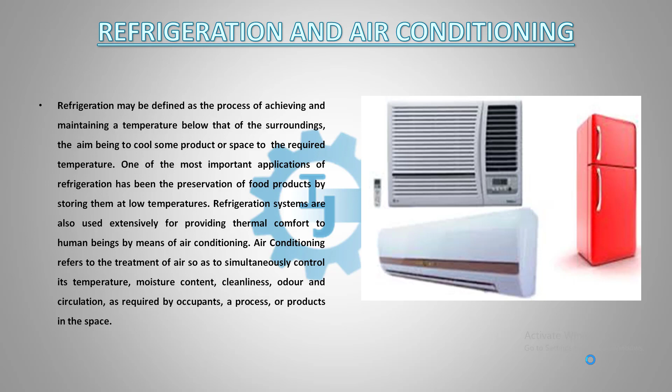Next we have to know what is the difference between refrigeration and air conditioning. In case of air conditioning, it is the process of removing heat and moisture from the interior of an occupied space to improve the comfort of occupants. And what is refrigeration? In case of refrigeration, it is a process of removing heat from a low temperature reservoir and transferring it to a high temperature reservoir.

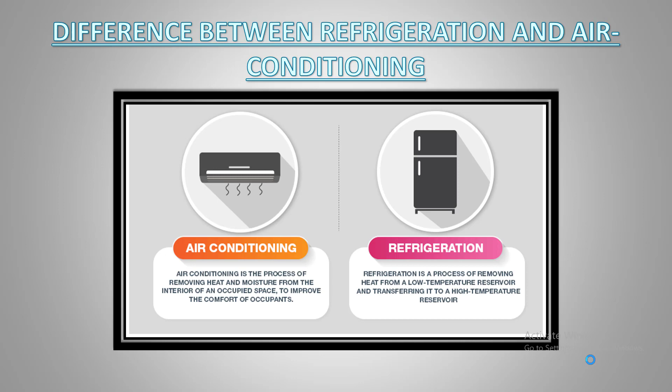The refrigeration system maintains the temperature around -20 degrees Celsius to 4 degrees Celsius, while air conditioning maintains a temperature range from 16 degrees Celsius to 27 degrees Celsius. Refrigeration cools down a small volume of space, while air conditioning cools a large volume of space. Refrigeration only lowers the temperature, but air conditioning maintains the environment, humidity, etc. So here we have understood the differences between air conditioning and refrigeration.

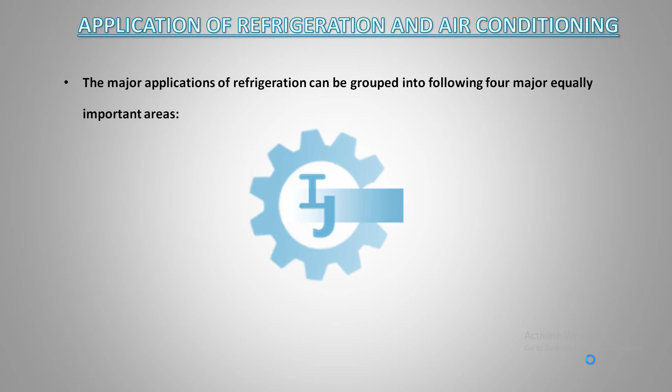Next we have to know the application of refrigeration and air conditioning. The major applications of refrigeration can be grouped into four major, equally important areas. One is food processing, preservation and distribution - we know in the food processing industry we store fruit, vegetable, fish, meat, dairy products, butter, milk, curd, etc.

We can use refrigeration in chemical and process industries, like separation of gases, condensation of gases, dehumidification of air, solidification of solute, etc. We can use refrigeration in special applications like cold treatment of metal, medical applications, ice skating rinks, and in construction, for manufacturing of ice.

And the next case is for comfort air conditioning we use the refrigeration system. Now we have to know what are the applications of air conditioning systems. The applications of air conditioning systems are industrial air conditioning and comfort air conditioning.

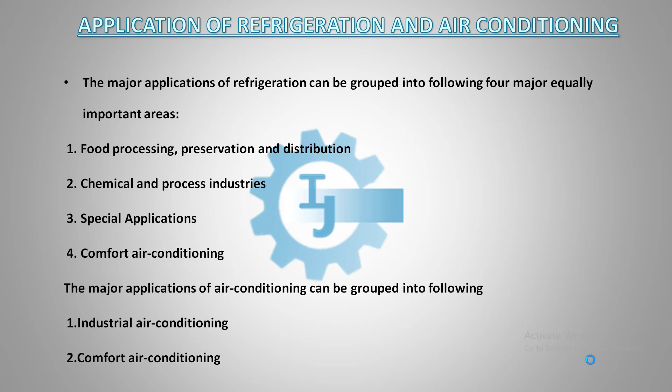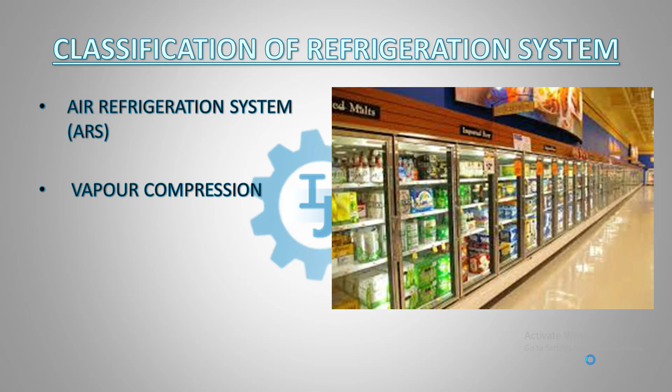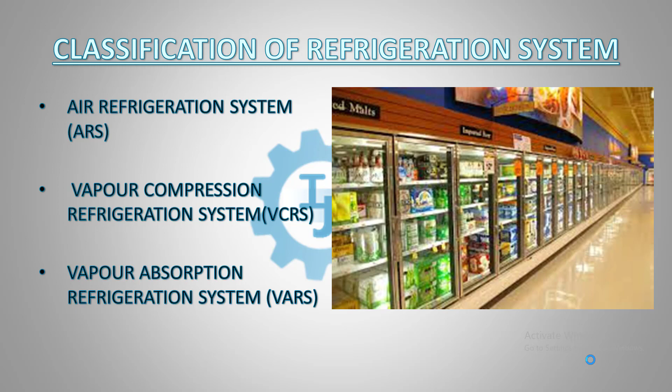Now we have to know the classification of refrigeration system. The classification of refrigeration system is: air refrigeration system, vapor compression refrigeration system, and vapor absorption refrigeration system. We have to study in detail these various types of refrigeration systems, their working principle, and their applications. Now, what are the classifications of air conditioning system?

According to the purpose, we can classify the air conditioning system into two categories: one is comfort air conditioning, another is industrial air conditioning.

What is industrial air conditioning? It creates, controls and maintains an environment inside the conditioned space that best suits the needs of the industry. In case of comfort air conditioning, it's aimed at giving maximum human comfort to the occupants or users of the conditioned space.

According to the season of year, we can classify the air conditioning system into winter air conditioning, summer air conditioning, and year-round air conditioning. We use winter air conditioning in winter season, summer air conditioning in summer season, and year-round air conditioning as an all-weather air conditioning system.

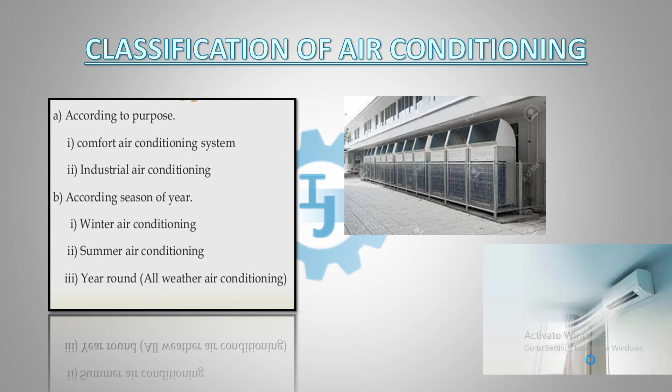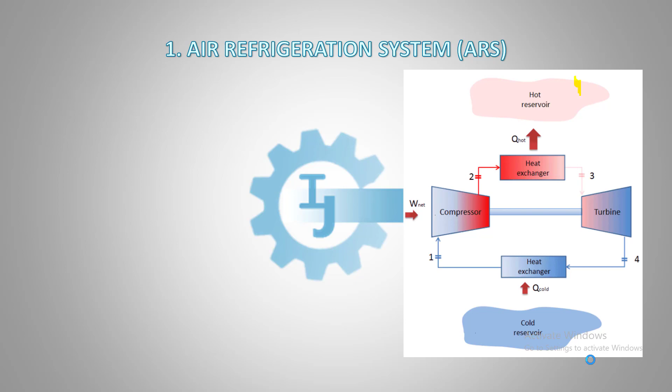Next, we have to know the air refrigeration system in detail. Here you can see a diagram of the Bell-Coleman refrigerator, which we will discuss in detail later. The air refrigeration system belongs to the general class of gas cycle refrigeration systems, where air is used as the working fluid. It finds application in aircraft cabin cooling and in liquefaction of various gases.

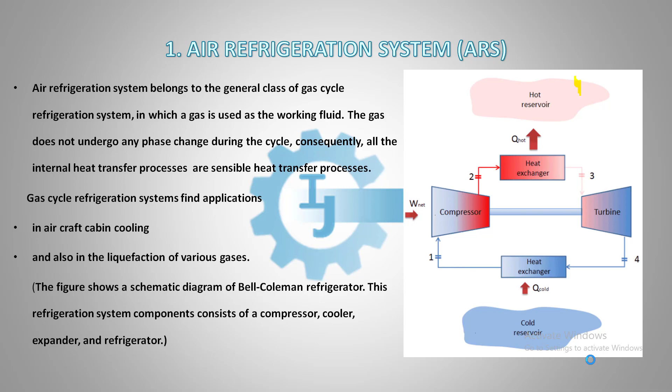So this is a schematic diagram of the Bell-Coleman refrigerator. I have previously told you what the components are. The components are...

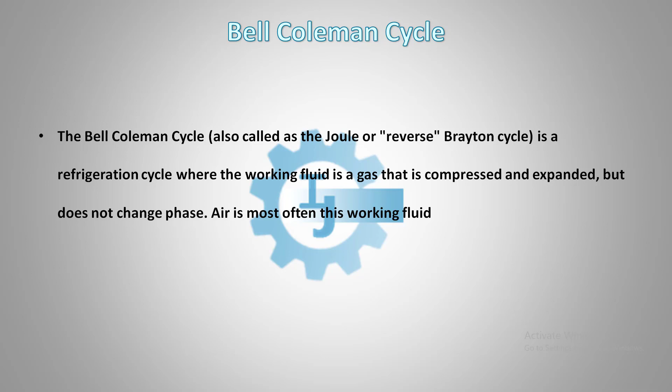The Bell-Coleman refrigeration system is also known as the Joule cycle or reverse Brayton cycle. Here air is used as the working fluid. This is also known as a modification of the reverse Carnot cycle.

Now we have to study the Bell-Coleman cycle in detail. This is the PV diagram, and this is the TS diagram.

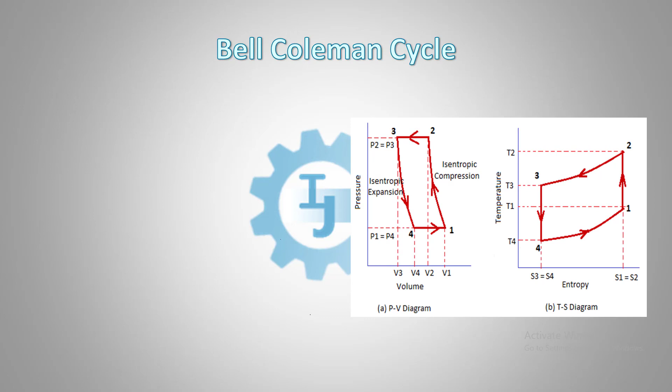Process 1 to 2 is isentropic compression. Process 2 to 3 is constant pressure cooling process. Process 3 to 4 is isentropic expansion. Process 4 to 1 is constant pressure expansion.

Here you can see the TS diagram also: 1 to 2 isentropic compression, 2 to 3 constant pressure cooling, 3 to 4 isentropic expansion, and 4 to 1 is constant pressure expansion. Process 1 to 2 is isentropic compression in the compressor, 2 to 3 is constant pressure cooling in the cooler, 3 to 4 is isentropic expansion in the expansion device, and 4 to 1 is the refrigeration effect.

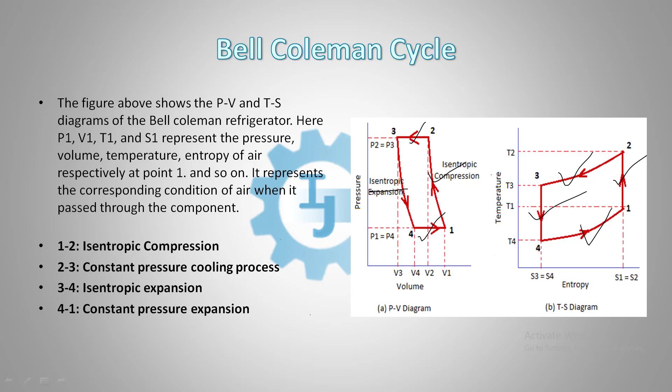We have to study the Bell-Coleman cycle in detail and find the equation for coefficient of performance. We know coefficient of performance is the net refrigeration effect divided by net work supplied.

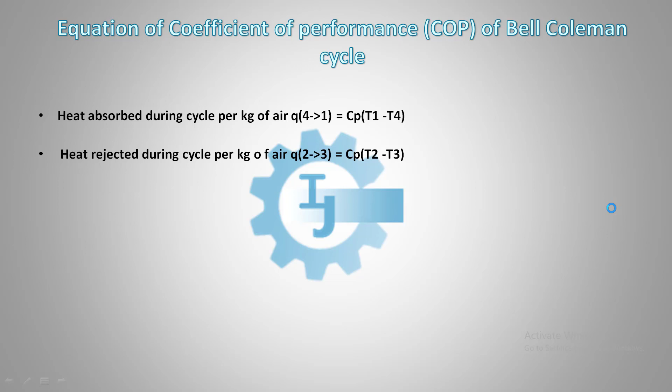So we have to find the work done per kg during the cycle. We know the COP is heat absorbed by work done, that is heat absorbed is Cp(T1 minus T4), and work done is Cp(T2 minus T3) minus Cp(T1 minus T4).

So we can neglect Cp. We can write it as (T1 minus T4) divided by [(T2 minus T3) minus (T1 minus T4)]. We can also write T4 into [T1 over T4 minus 1]... wait, let's simplify: in the denominator we can take T3 out, giving T3 into [T2/T3 minus 1] minus T4 into [T1/T4 minus 1].

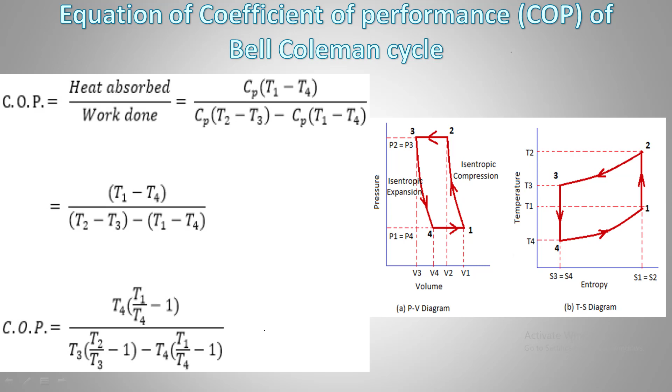For isentropic compression, process 1 to 2, we know T2/T1 equals (P2/P1) to the power (gamma minus 1)/gamma, where gamma is Cp/Cv. For isentropic expansion, process 3 to 4, we know T3/T4 equals (P3/P4) to the power (gamma minus 1)/gamma.

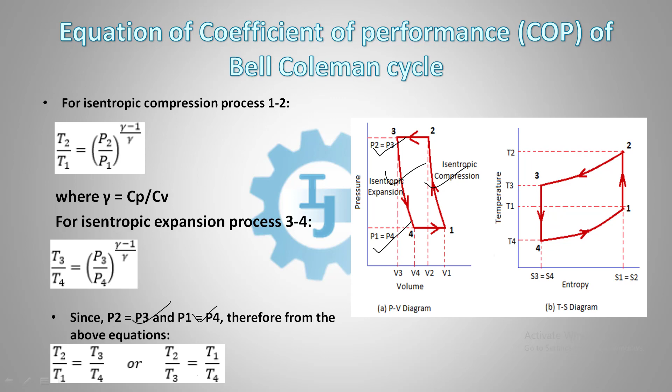Since processes 2 to 3 and 4 to 1 are constant pressure processes, we can write P2 equal to P3 and P1 equal to P4. Therefore T2/T1 equals T3/T4, or T2/T3 equals T1/T4.

Substituting this into the equation, we find COP equals T4/(T3 minus T4), that is 1/[(T3/T4) minus 1]. For T3/T4, we can write (P3/P4) to the power (gamma minus 1)/gamma minus 1, and since P3/P4 equals P2/P1, we can write COP as 1/[(P2/P1) to the power (gamma minus 1)/gamma minus 1], so COP is 1/(Rp to the power (gamma minus 1)/gamma minus 1).

So here we found the COP, that is the coefficient of performance of the Bell-Coleman cycle or Bell-Coleman refrigerator. We know COP equals net refrigeration effect by net work supplied. And what is Rp? Rp is the compression or expansion ratio, that is P2/P1, which is equal to P3/P4, as we have already discussed.

Process 2 to 3 and process 4 to 1 are constant pressure processes, so here P2/P1 equals P3/P4.